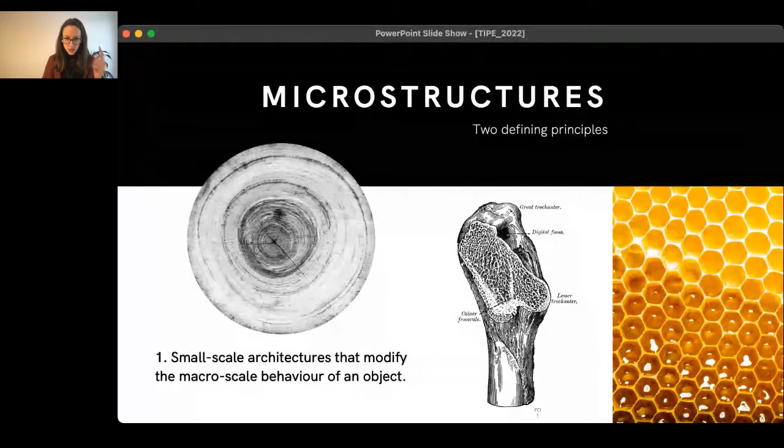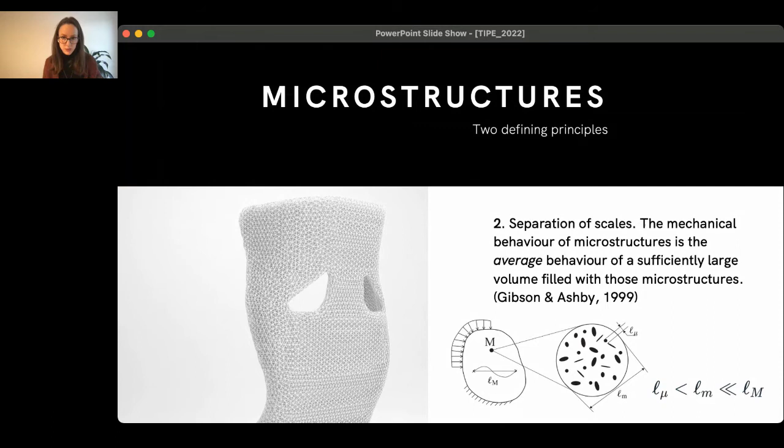The second principle is this idea of separation of scales. I want to conceive of microstructures and their mechanical behavior as the average behavior of a sufficiently large volume filled with those microstructures. You can think of it this way: in this part, the lattice units, these little beams, are very small relative to the size of the overall part. Or in the schematic, this little dot here is the microstructure, and it's very, very much smaller than the macro scale, the scale of the overall part. So these are the two key principles I want to focus on for microstructures - separation of scales and the micro scale impacting the macro scale.

Now I need to talk a little bit about homogenization. The motivation for thinking about that separation of scales is in part due to the idea of homogenization - when we're working with lattice geometry, for example, lattices are a type of metamaterial. When we're working with lattice geometry, a lot of the time we get sort of stuck. I don't think you can see my mouse.

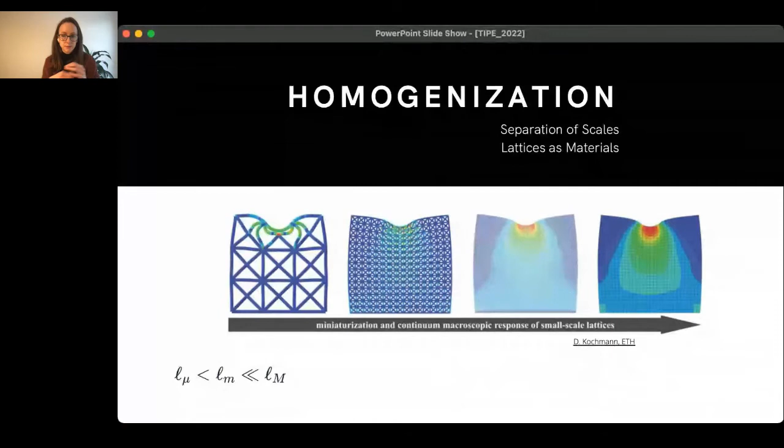The point is that we can achieve uniform material properties by miniaturizing those lattice units so that they become very small relative to the overall size of the volume being considered. This is the key idea I'm interested in: lattices and metamaterials as actual materials, where we think of them as having real material properties. When we do that, we're able to set them in the context of other materials.

That's really at the heart of this idea of mechanical metamaterials: that we can vary geometry to get remarkable properties that actually go beyond what we find in nature and chart new territory in material property space.

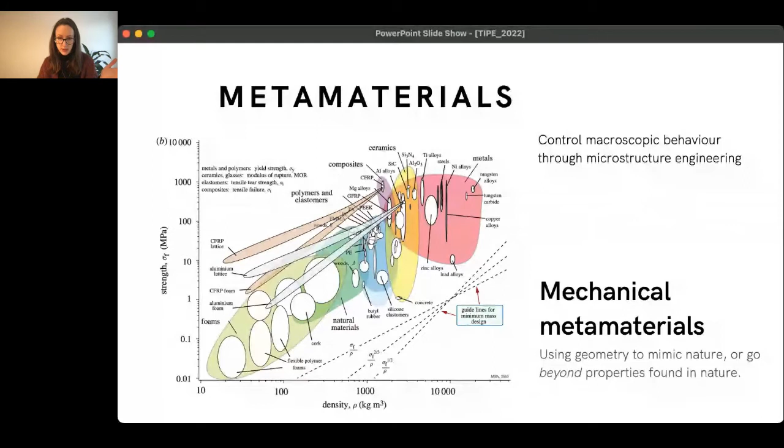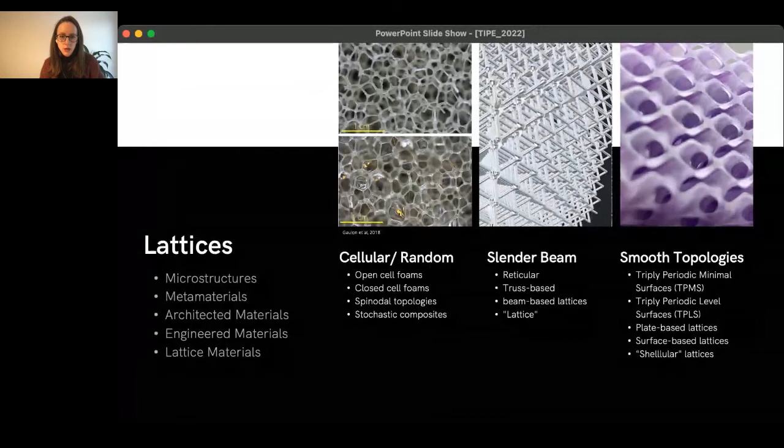Okay, so I do want to mention a few applications. Hopefully you've got a sense of what metamaterials are, and I think we've all probably seen a lot of applications already. Certainly footwear and helmets — metamaterials are used a lot for impact mitigation, which is why they come up so much in sportswear. I think those applications are super cool; I've been working on them for a good number of years, so I really like them. But today I actually want to focus on a different set of applications, which are maybe less well known. These applications really come from this area.

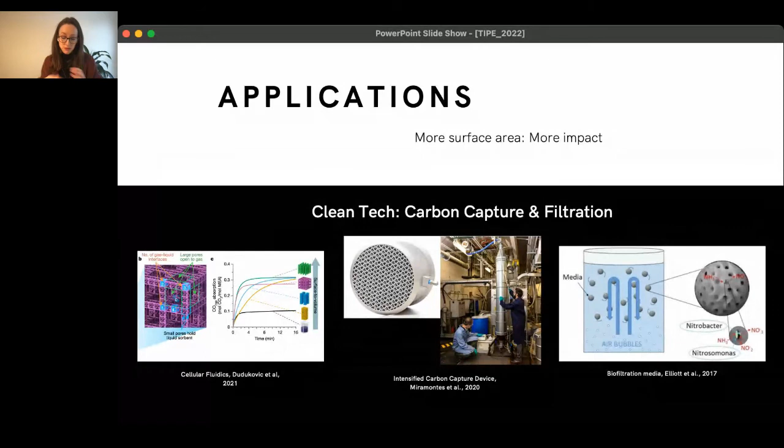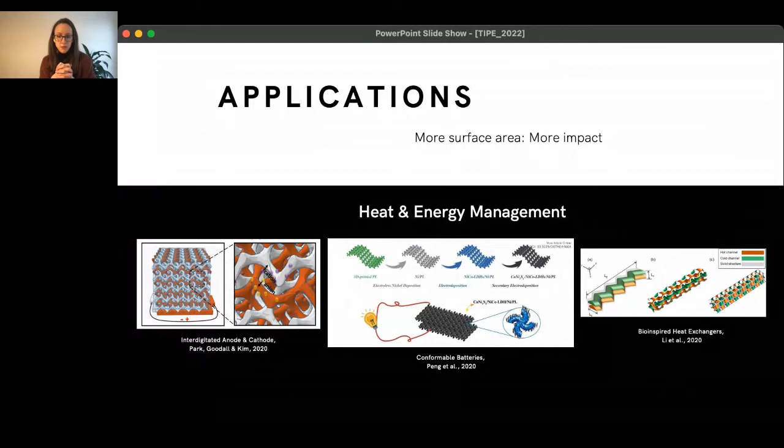So those are just a sample of applications, and hopefully I've convinced you that metamaterials are cool and we should be thinking about how they apply. But now I want to talk about some of the challenges.

So I'm going to identify 3 challenges. The first is in exploration. And I find that often when people encounter lattices and 3D printing, they want to jump right on and print some lattices, which is cool. But actually, how do you find the best lattice or metamaterial for your particular application? And this is kind of a more challenging problem than you might think, because the space of lattices is infinite. And how do you actually find the best one? So that's really the first challenge.

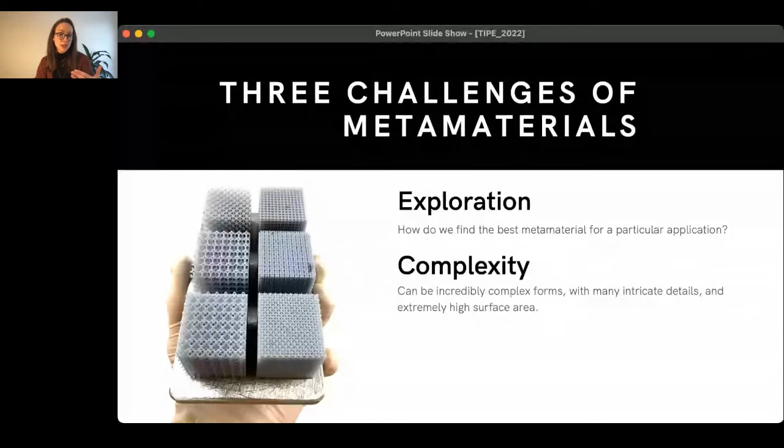The second challenge is just complexity, that these are incredibly complex forms, many intricate details, and very high surface area. So this makes things like capturing them as a surface representation, like a triangle mesh, very unappealing. It's something you can only do if you're looking at very small quantities of lattices.

And then finally, scale. So actually manufacturing these things. As I just said, many AM processes actually require that surface representation, which is then sliced and sent to a printer, which creates a computational bottleneck. So how do we actually communicate these lattice geometries in a better way to printers, to the hardware?

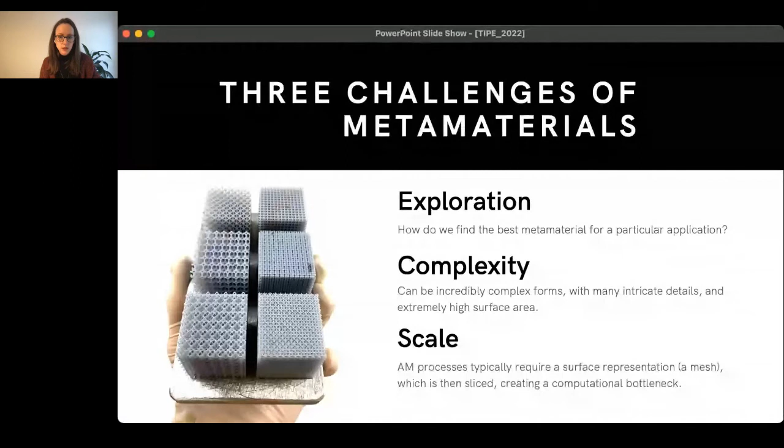It's a little oversimplified, but the way I see it is that 3D printing is really good at the moment at producing large parts, or on the other hand, it can produce small and detailed parts, but it doesn't do both at the same time. It doesn't print very large, very detailed parts.

And I do want to mention that this is really not a very large part at all. I saw a great talk yesterday about someone printing parts that are as big as a ship or an army vehicle. So really, how large can we go, and also how detailed? So what is the resolution-size trade-off, and does there need to be a trade-off?

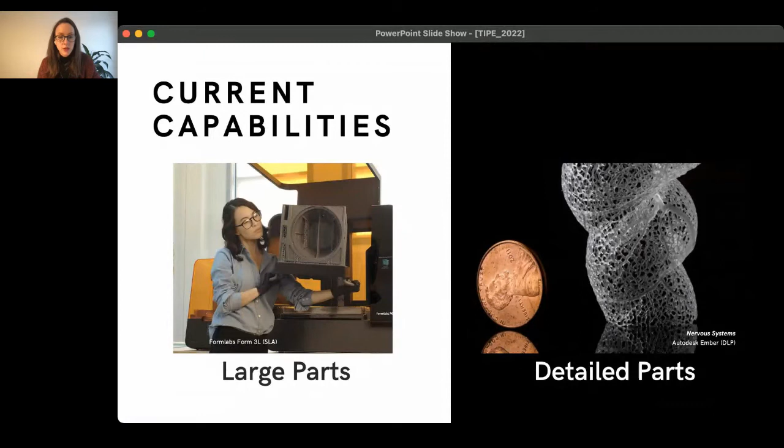So the result of this is that in my experience, there's really a limited use of metamaterials in industry. And so we see projects like this one, which I again think is a super cool project, but it really is still in that lattices-as-structures regime, where these are large lattice elements. We're not really viewing the lattice as a homogeneous material. We're viewing it as a structure, and it can give some nice properties, but it's really still in that structure area.

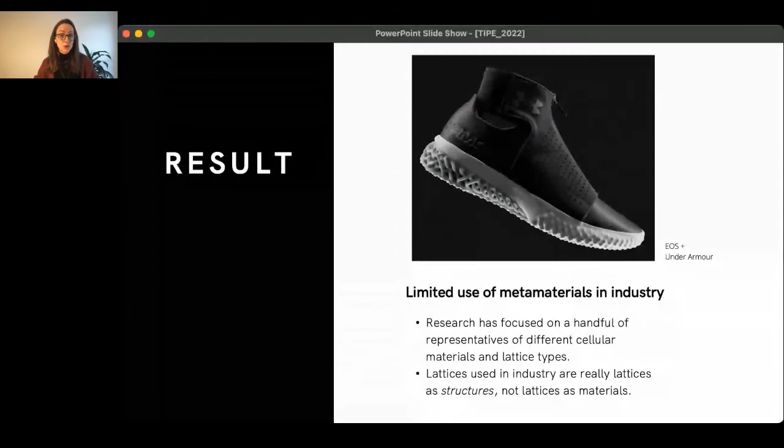In addition to that, a lot of the research and the implementation has focused on only a handful of representatives of different metamaterials and lattice types. And this speaks to that exploration piece, that it can be hard to find the right lattice or new lattices to meet your needs.

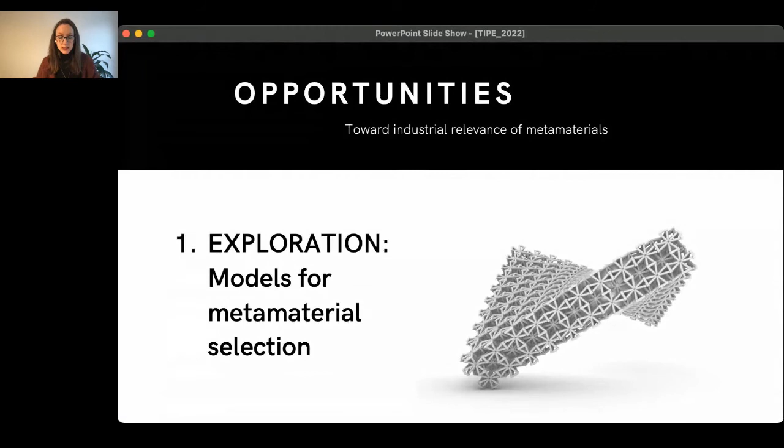So I do want to talk through some opportunities, an outlook here on how we might think about using metamaterials in an industrially relevant way. So the first is on that exploration piece. There has been some really interesting work in trying to solve this. So actually, the first one I want to talk about is something that I worked on.

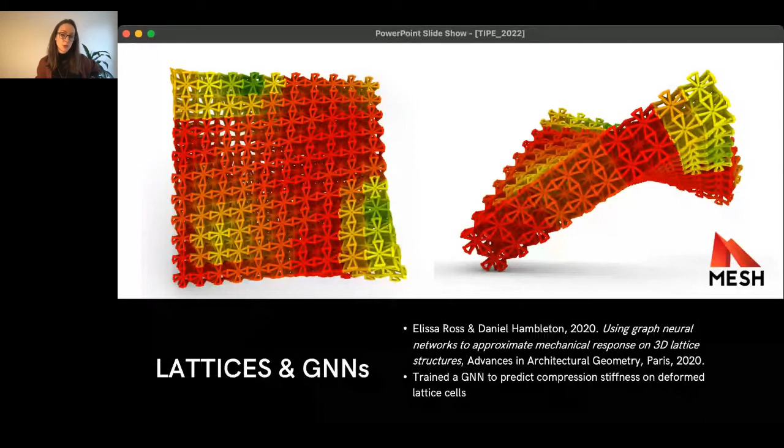So this is a paper I wrote with my colleague Daniel, where we trained a graph neural network on lattice geometry to predict compression stiffness. So this is really nice because it means that if you're a designer and you're trying to work with a lattice, you don't actually need to run simulation on the whole thing, but you can actually experience in real time using that trained model whether your changes are causing the lattice to become more or less stiff relative to a particular force.

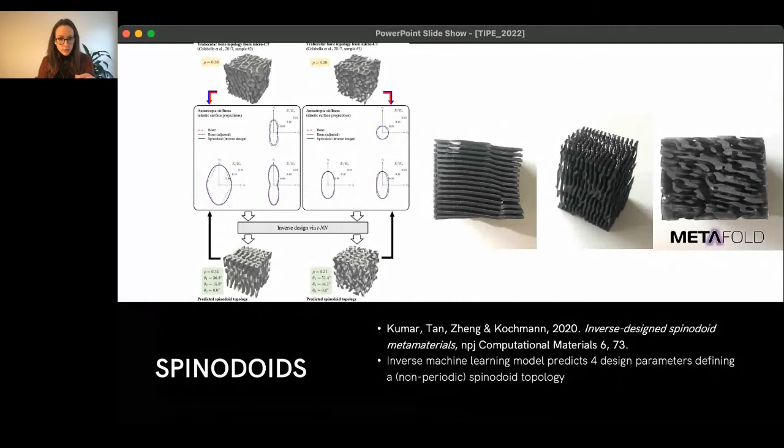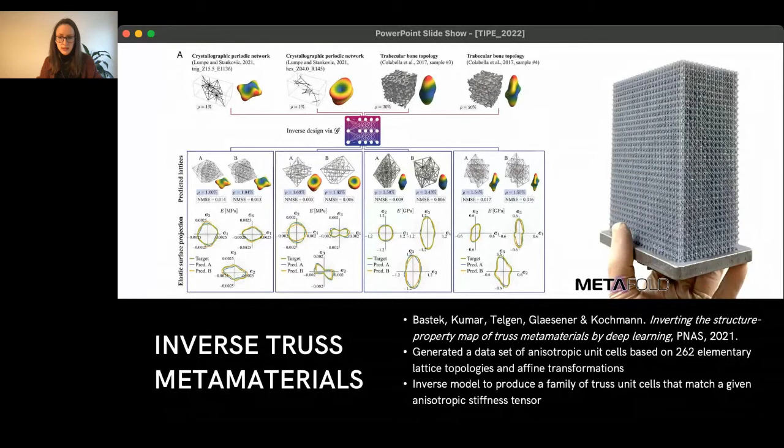So, and again, on the right is just some lattice sample that we printed at Metafold. So let me actually move now to what we do at Metafold and how we use some of these ideas. So our big thing is to address both of these challenges, the exploration challenge and that complexity scale challenge, through new manufacturing methodologies. So the first part is like an exploration tool where we have a cloud-based lattice and metamaterials app. This is also a cloud-based slicer.

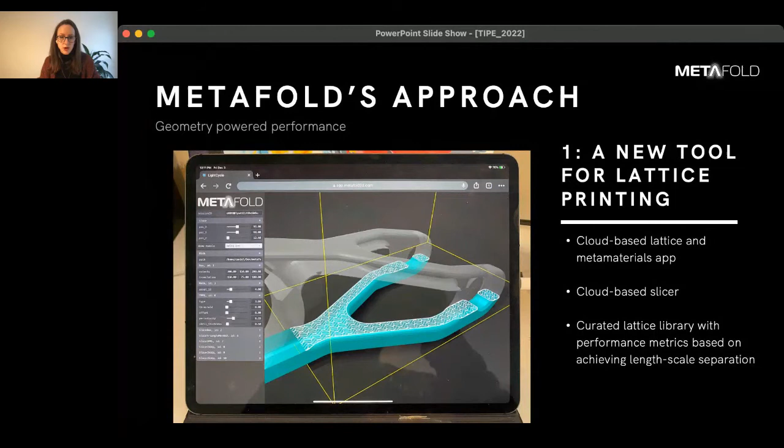So we have a curated set of lattices that cover a spectrum of different material behaviors, and those material behaviors are really based on the idea of achieving length-scale separation. So this is our web app, but once you've got your lattice geometry, this is powered by what we're calling geometry streaming. And this is where we're taking a very hardware-first approach to software.

So the way I like to think about this is we're printing some kind of metamaterial or lattice geometry that is so large, so intricate, that we wouldn't want to represent it all in memory or try and spin it around or even slice it and send it to a printer. So what we can do is actually work directly with printer hardware, and the printer hardware can kind of pull from the software. So the printer can say, I'm in position X, what do I need to know? And then the software will actually compute the geometry that it needs to execute that print at that time. And it goes along like this. So it's a tight loop between the software and the hardware.

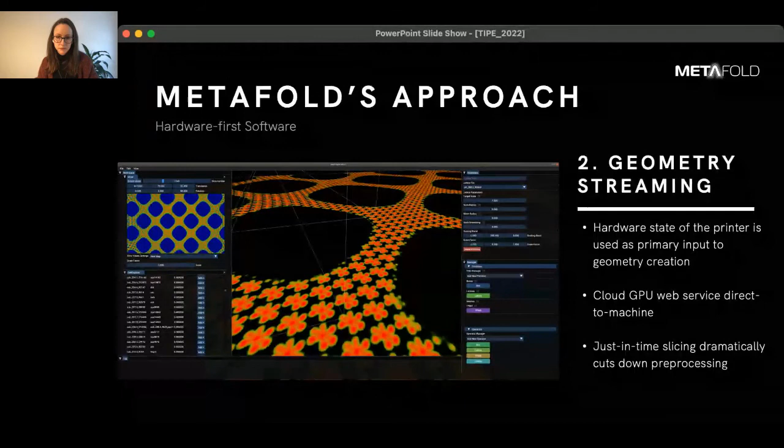And so it's not quite real-time slicing, but this is just-in-time slicing, where as soon as you've configured your lattice geometry, your metamaterials, you can hit print, and your printer actually begins printing right away. So you don't need to wait for that file to save, to load, to slice, to send. All those things are eliminated. And so the result of this is that we are just printing more lattices, more surface area. Using this very data-driven meshless approach, we're able to eliminate that computational bottleneck. And the effect here is that we basically decouple resolution from build volume.

So there's nothing about this methodology that would not scale to prints the size of a tank or whatever you might want to do. So I think this is something that we're really excited about, this idea of scaling up dramatically some of these amazing advances that are happening within research, but that are kind of stuck within a very small scale. And I believe that a lot of that work that the researchers are doing on carbon capture, filtration, and energy management, all these things are potentially highly relevant to not just industry, but society at large, but that we need methods to scale up the production methodologies. So that's what we're really aiming for at Metafold.

And if I can conclude with a kind of outlook or vision, my first point would just be that surface area matters, that we need to be thinking about the restrictions that are placed on what we are printing due to the way we handle geometry. And if we are able to handle geometry in a different way, we're able to produce more surface area, and this can lead to incredible applications.

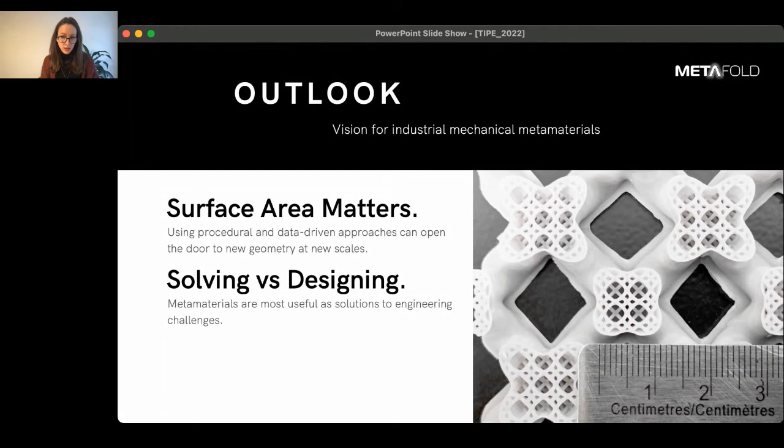And then finally, as I already mentioned, we're really interested in amplifying the research that is already being done by the engineering community on metamaterials. And we have an open invitation to anyone who is interested in collaborating to push the boundaries of that methodology. So we're really excited about that.

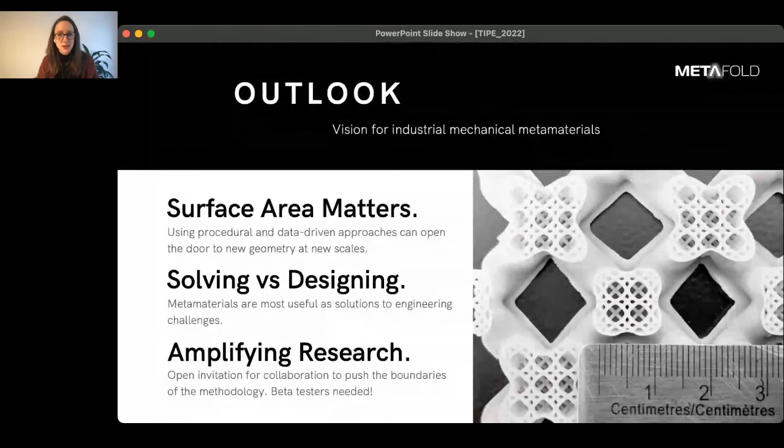The first one is, what additive technologies are you using to print these metamaterials? Yeah, so that's a good question. So we prototyped a printer. Let me just go back here. Oh, sorry. Yeah, we prototyped a printer. It's what we printed this with. So this is a DLP-based printer that actually had a moving projector. So the projector slid along an axis, and then that's where the hardware feedback really comes in, because the hardware can say exactly what its position is and tell the software exactly what it needs.

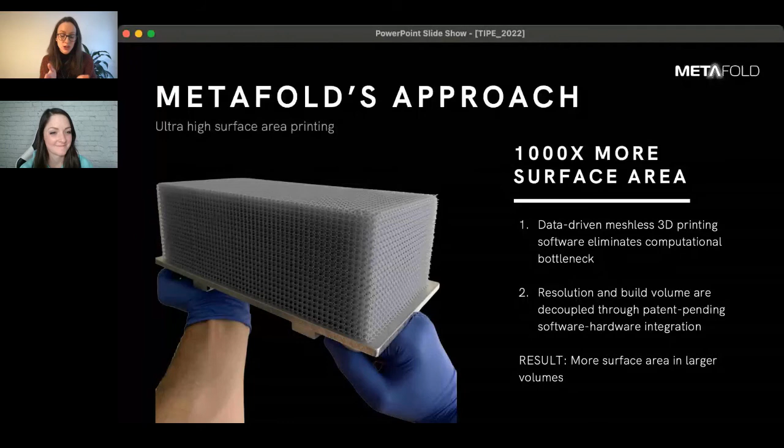And so you can imagine this scaling up to either more projectors in an array or on linear rails as we had. So our approach was a DLP approach. To be honest, though, these prints were printed on an Anycubic printer, like a consumer printer, just using our software to generate them. But we see a lot of potential. Right away, our tech works with any DLP technology or MSLA, but we see a lot of potential for other types of AM processes.

And so we're really excited about the idea of procedural toolpaths. We don't have a lot to say on that yet, but we're ambitious, and we feel like that's something that we can contribute to eventually. So DLP for now, MSLA for now, but other light-based techniques, and eventually hopefully a broader spectrum of techniques as well.

Great. What does the future look like for multi-material metamaterials? That's a mouthful. Yeah. Multi-material metamaterials. So it's funny, we did think about this actually in the context of batteries, because for batteries you need multi-material printing. And so what does the future look like? I don't know, but I think that there will be a demand for it actually because of batteries. So that's all I can say.

You know, one of our decisions at Metafold was to focus on software, not on hardware. And I would love to see someone take up the challenge in hardware of that. And I believe that our tech would have something to say on the software end for the multi-material metamaterials.

Great. Are you able to understand fatigue life of metamaterials? Yeah, so that's something that is in the research domain. How do these things behave over time? And actually, one of the interesting things I can say about fatigue life is that we find, and it's been established actually, that those stochastic geometries, like the spinodoid topologies and the other more randomly generated topologies, are much better adapted because they kind of distribute the stress.